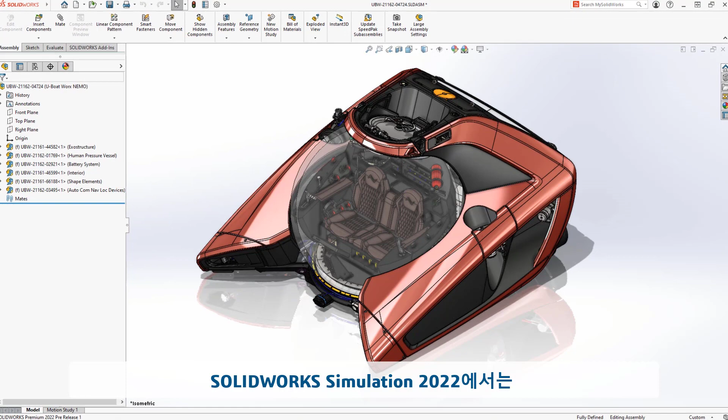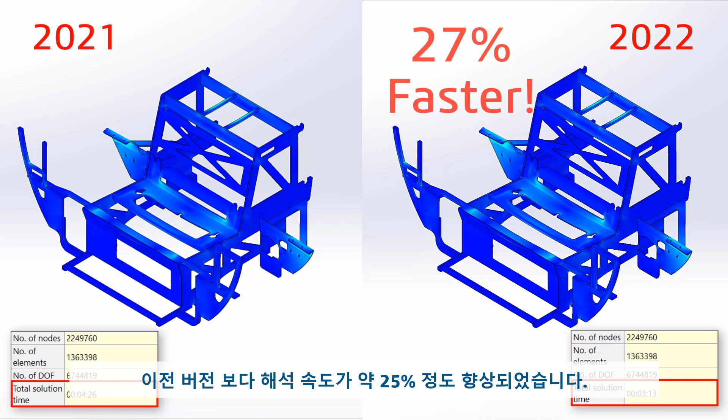SOLIDWORKS Simulation 2022 adds new capabilities that simplify analysis setup, improve performance, and increase the accuracy of your simulations. The internal frame of the Nemo personal submarine contains a large number of bonded contacts. Solve time for this type of geometry is now over 25% faster than Simulation 2021.

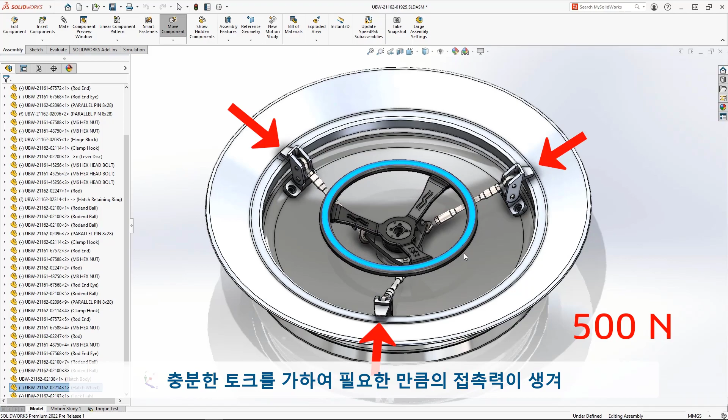The Nemo submarine utilizes a specialized hand wheel to secure the hatch while diving. Engaging the latch fingers requires a minimum of 500 newtons of contact force. This would ensure almost any passenger is capable of applying enough torque to properly seal the craft.

Taking advantage of cyclic symmetry by cutting the model down to a third will save setup and solve time. The model can be further simplified by removing this tie rod and replacing it with a new type of virtual connector, the linkage rod.

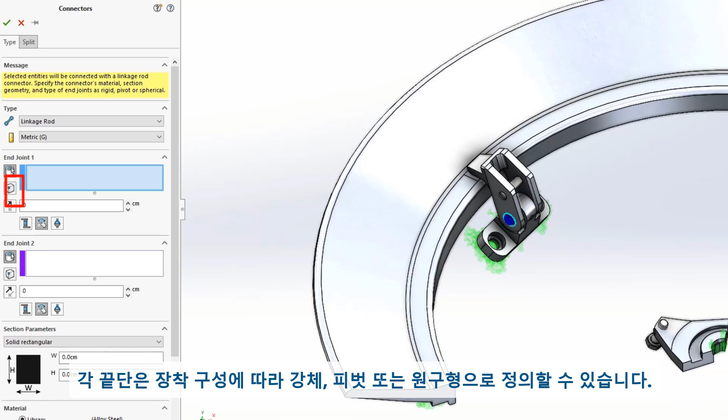The linkage rod connector accepts either cylindrical faces or vertices to represent the rod ends. The end conditions can be defined as either fully rigid, pivotal, and even spherical. We'll select cylindrical faces and spherical end conditions to properly simulate the function of the tie rod. We can even choose from several cross-sectional shapes and define the section dimensions.

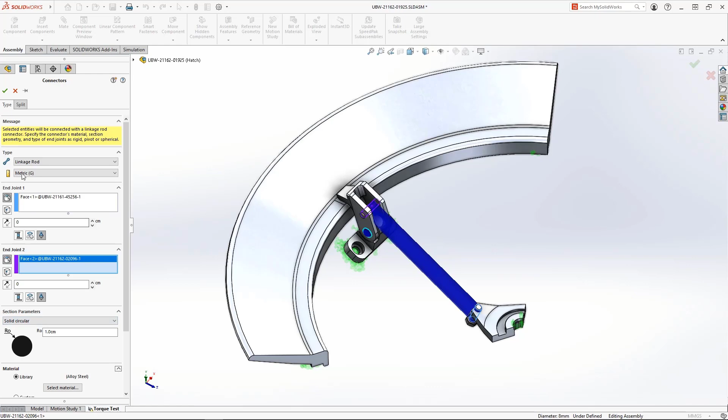SOLIDWORKS Simulation 2022 now defaults to the powerful blended curvature-based mesher, which can now accept mesh control values outside of the maximum and minimum global size range. This means you can refine or coarsen the mesh in any region without limitations, helping us reach that optimum balance of solve time and accuracy.

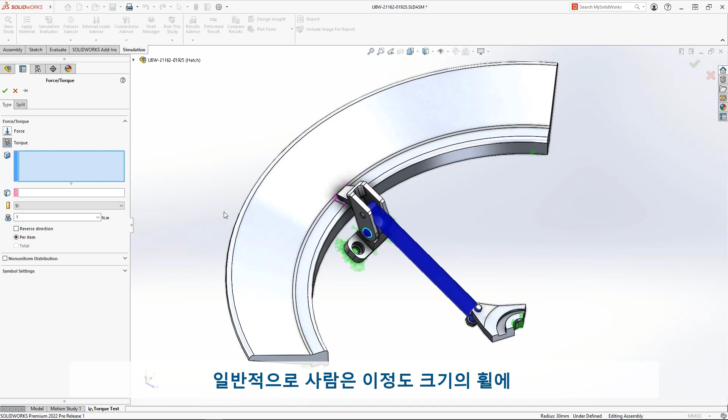Next, we'll apply a torque to the center rotor. The 5th percentile of humans can apply 16.5 Newton meters of torque to a steering wheel of this size. Since we're analyzing a symmetric model, we'll cut that value into thirds.

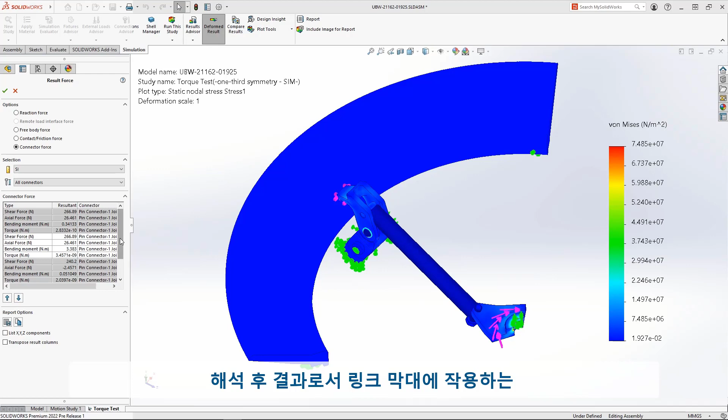After running the analysis, we can review the shear, axial, and bending loads of the virtual linkage rod, as well as solve for the contact reaction force developed between the latch finger and the latch flange. Multiplying this contact force by 3 is less than the 500 Newton requirement to properly seal the hatch. The design needs to be changed.

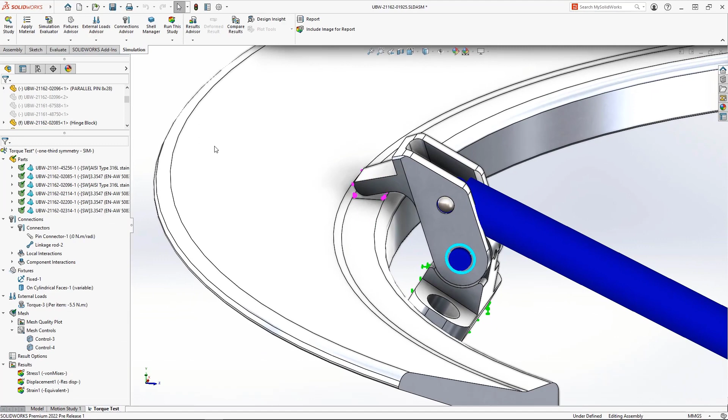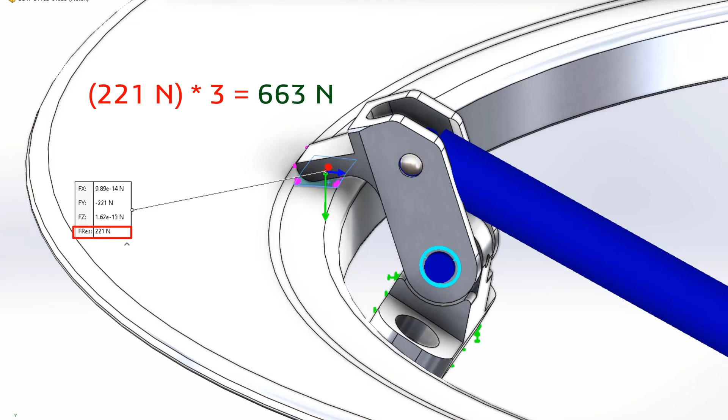Let's try moving the connecting rod attachment 10 millimeters further away from the pivot. This should add additional contact force without requiring additional torque. Success! This small change increased the contact force by 38%. We're now safely past the 500 Newton minimum.

SOLIDWORKS Simulation 2022 adds new functionality that refines the setup process and provides under-the-hood enhancements that speed up performance and increase solution accuracy.